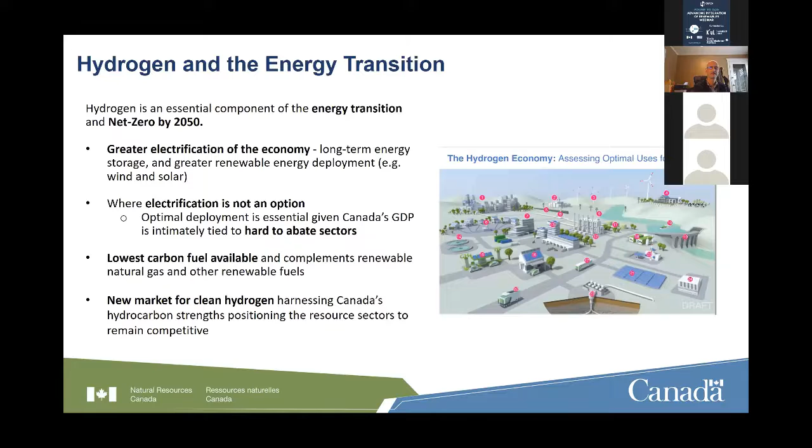But there's also a market with clean hydrogen that can harness Canada's conventional hydrocarbon strengths. I'll talk a bit more about that. But really, the hydrogen and fuel cell story is a Canadian story.

Even though globally there's a lot happening, it really started here in Canada, on the hydrogen side in 1915, with an early patent for large-scale hydrogen production, originally for fertilizer use, using Canada's clean electricity grid at the time in Niagara Falls. The first very large-scale hydrogen production equipment was developed in 1920. And in 1935, there was an original patent for direct reduction of iron using hydrogen.

That becomes important because that's a new market that's just expanding for hydrogen now. And then, of course, fuel cells—for more than 40 years, Canadian companies have been leading in the fuel cell industry as well. The first group of vehicles was in Vancouver, the first bus fleet deployed in Whistler, and then the first train in Germany also used Canadian fuel cell technology. So the hydrogen and fuel cell story really is a Canadian story.

But there's been false starts. What's different this time? This is a question we hear as policymakers all the time. Well, really now it's that perfect storm—technologies, strategic partnerships, and policies all pulling together. The Canadian government and governments around the world are focused on climate action, on energy transformation, on energy security, and on economic growth. Especially now in the post-COVID recovery lens, economic growth is essential, and there are really opportunities for hydrogen there as well.

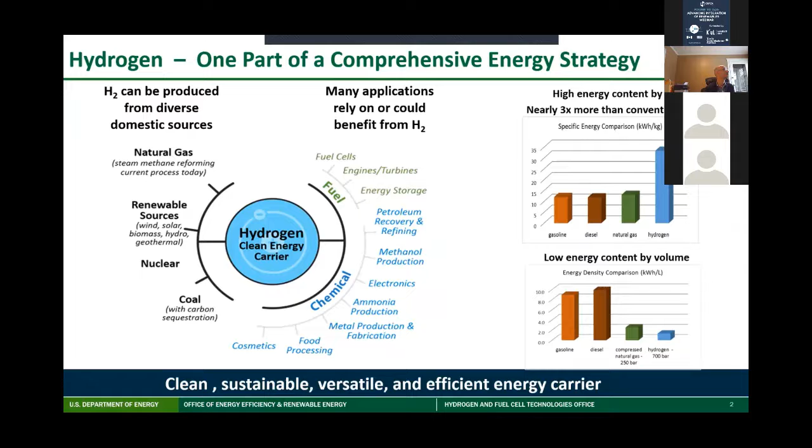Caverns, for instance, can store gigawatt hours of energy, so for long duration energy storage there's growing interest. There's also quite a few stations, a lot of state activities.

We have about 45 commercial retail stations, again mostly in California, and about 8,500 commercially sold or leased fuel cell cars - more than any other country, and that's partly because of the ZEV, the zero emission vehicle mandate. But it's really not just about vehicles.

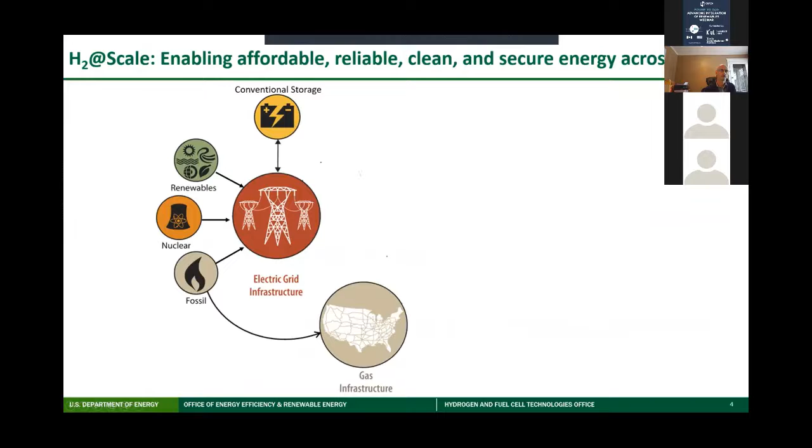That's where I think it's important to emphasize the intent of this workshop. And the vision is what we call H2 at scale, also called power to gas, or some countries call it sector coupling. Today we have basically the conventional grid shown in orange here, primary sources, and then the gas grid.

And if we produce hydrogen, you can see that opens up a number of possibilities. You can either feed that back to the grid using a fuel cell or turbine, or you can inject it into the natural gas pipeline. What's key is you can open up a number of other opportunities across sectors and across applications. You can see you couple and decouple from the grid in very unique ways with hydrogen. And the value, again, is not just for one application, but opening up the benefits for multiple applications.

Even steel manufacturing, for instance - we're seeing it as a big contributor to greenhouse gas emissions - using hydrogen for steel, fertilizer, and hydrogen plus CO2 for liquid fuels, increased interest in that space as well.

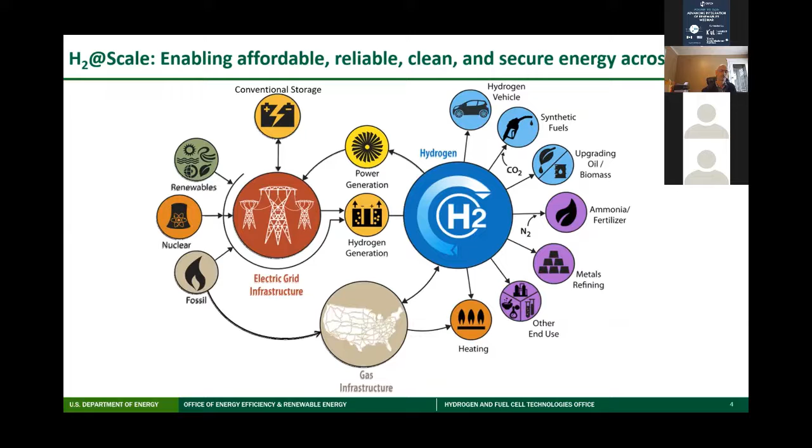So again, that's from a big picture perspective, but what really is different now compared to previously? I've also, as Aaron, we've known each other for a long time, been in this field. I think many of you on this call have been in the field for a long time. And I'll just highlight three main areas I think things have changed.

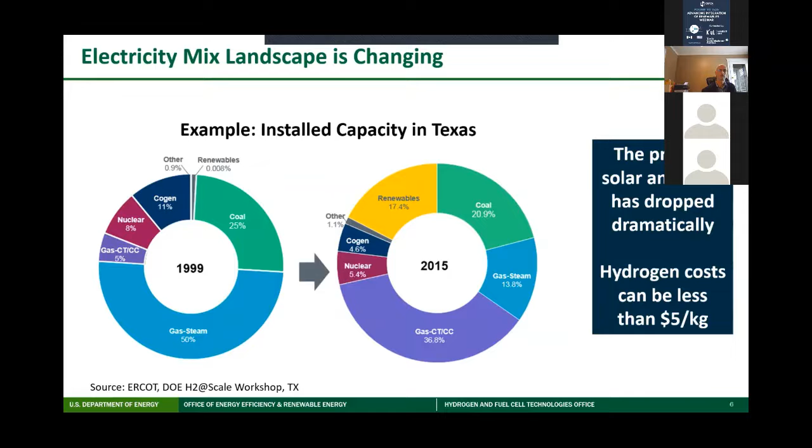We've shown this through our national labs. We have 17 national labs under the Department of Energy with significant R&D and demonstrations. For the very first time, we are going to be connecting a fast charger to the electrolyzer system and looking at that grid interaction, how we can compensate. That's the second area.

Change in the grid mix, the type of grid profile. And then finally, the last but not least, which I think is a major change compared to before, is that they're actually commercial products. Costs are coming down, thousands of commercial products across applications - stationary fuel cells, vehicles, stations. For the first time, we've actually surpassed the 1 gigawatt mark in terms of fuel cells shipped worldwide.

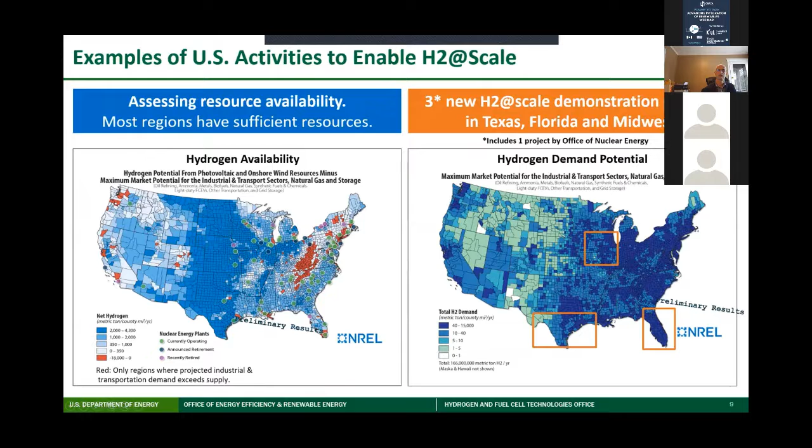And for the first time, we announced we have 3 new H2@Scale demonstration projects. And it's not just California, we have Texas, the Midwest, and Florida. Our slides will be available, but I'll walk through quickly these examples for the purpose of this conference.

To showcase Texas, looking at solar and wind, again producing hydrogen, also from renewable natural gas, and then using the hydrogen for multiple applications, including a data center.

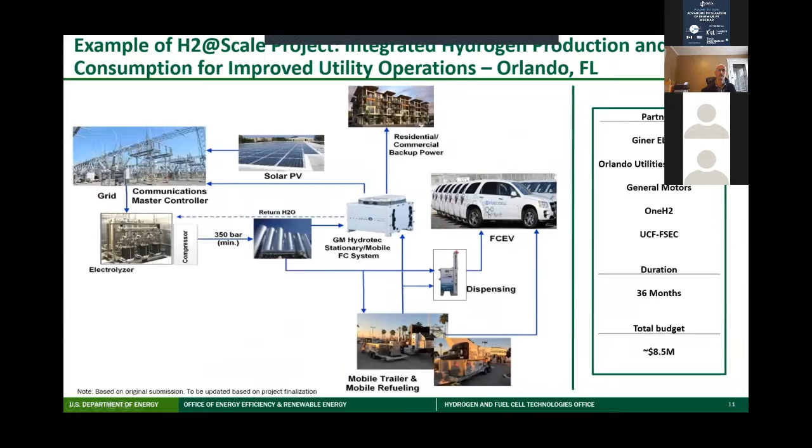In Florida, we have solar going to the electrolyzer, in addition to vehicles, looking at backup power for buildings. And then finally, for the first time, we actually have 1 nuclear-to-hydrogen project where we have an on-site electrolyzer that will produce hydrogen both for the plant's needs and also looking at additional end uses for that hydrogen. A number of partners - industry, utilities - we're really excited about these projects.

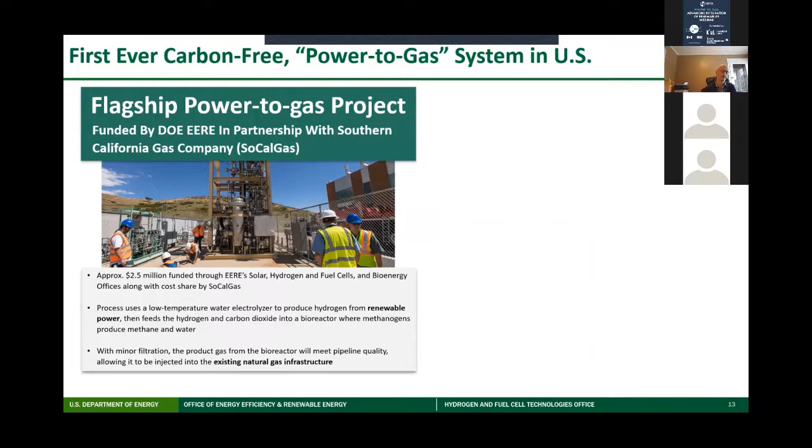And then finally, we did announce the first ever carbon-free power-to-gas system in the US, and you'll hear shortly later this afternoon from Kevin Harrison, who will describe this in more detail.

This essentially uses an electrolyzer, produces hydrogen plus CO2 for the first time with a biological process. A number of partners, including the largest gas utility in the US. So very excited about that. Feel free to look at the details and you'll hear from Kevin shortly.

And then in addition to producing methane first and then injecting into the natural gas pipeline, you can also just inject hydrogen.

I'm glad to see on the agenda you'll have more on this topic. We've recently looked at, for instance, in the US, if we could inject 20% hydrogen blends, that could enable doubling US renewable consumption, because today we produce about 700 terawatt hours. And that's the amount you would need to get that volume of hydrogen for the US pipeline.

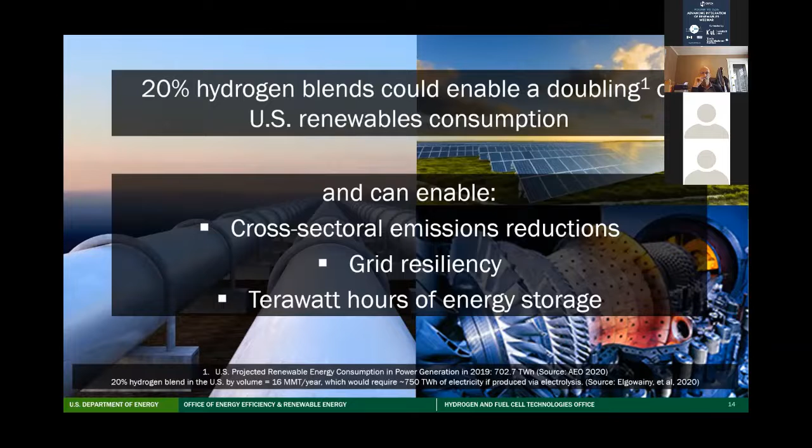So again, showing how indirectly hydrogen blends can enable cross-sector emissions reductions, obviously grid resiliency, as I mentioned, with the electrolyzer, and a huge amount of energy storage. We've launched a HyBlend consortium and other lab activities that we're starting to look into on how to enable hydrogen blending with natural gas.

And then finally, one area we always get questions about, so I always like to end with this, and I think Darren also alluded to it, is the importance of safety. As we see new players coming into the market space, they have questions about siting hydrogen, risk analysis, and so forth. So we have a lot of tools available.

In case you're not aware, there's a global Center for Hydrogen Safety that was launched. I know Canada's been a strong partner as well. It's modeled after the Center for Chemical Process Safety, with industry leads, governments, and major companies also supporting this. Go to aiche.org for access to 110 countries and a number of members providing resources, tools, and training information. Hopefully if anyone's interested, feel free to look this up. We can also connect you with the right lead there.

Anyone can join. And in the spirit of the conference and the co-organizers, I'll end with: in addition to our office, which is one of the technology offices at DOE such as solar, wind, hydrogen fuel cells is one of those, but we also have a DOE office of Indian energy.

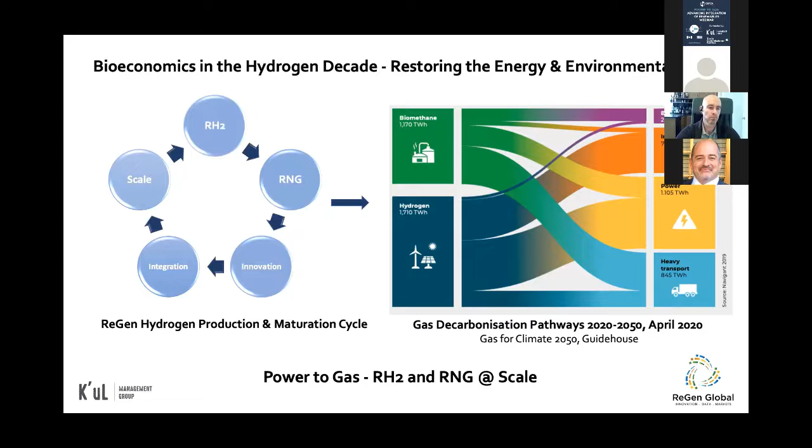And we've got an interesting chart here about the end uses for biomethane and hydrogen in buildings, industry, power, and transport. Aaron touched on a lot of that, and so did Sunita. But our goal is to take the best of what those programs have to offer and then integrate them into our work in innovation and investment ecosystems on the Canada and US side, bringing the core competencies of each country and their talent together in a way. And we create these new niches based on innovation, data, and markets.

And our first piece, as Jonathan mentioned, is we've got this renewable hydrogen that we'll be producing. We'd like to inject it into the pipeline, but we'd also like to branch off from that pipeline and build, as part of the development for K'uL Group in Penticton, a community that's 100% hydrogen, using the models that are occurring right now in the UK and Australia. We carve out 100 of 1,000 homes, and we run them off of a 100% hydrogen microgrid, using the strategy, the sites, the assets, the data, the expertise, and the collaborative foundations that are already in place with our UK partners and our Australian partners.

And we have those as well. We just didn't want to include this in the slide. We wanted to focus on Canada and the US. But as Aaron mentioned, this is very broad-based.

This breakthrough in hydrogen is real. This is the first year of the long-promised hydrogen economy. And there was some thought and concern: what's going to happen? Because of the coronavirus, is this a setback? Are we all in limbo again? And what we found is not only are we not in limbo, but people are doubling their investments, or they're accelerating their pilot projects and demonstration projects. So that's worked very, very well for us, because we're ready to move on this, and we're ready to move on this now.

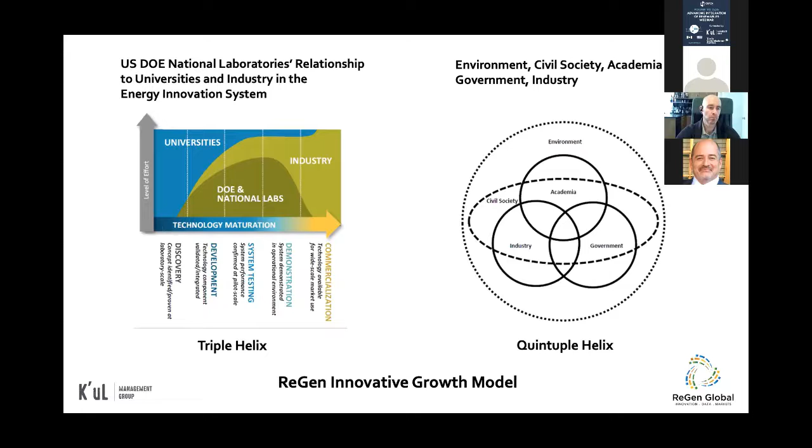This is an important piece on the relationships between Indigenous Canada and Native US and how we can build this clean energy consortium. The International Intertribal Trade and Investment Organization is a critical group, Canadian-based, that's brought a lot of this communication and collaboration together. They've done a lot of relationship building on the US side. Of course, there's the British Columbia Assembly of First Nations.

And then there are all of the US players, particularly the Oklahoma players, with the tribes represented there, and the Iron Horse Industrial Park, where ProPipe will be building their new pipe, and they will be building a custom blend for us for hydrogen to take us into these microgrid projects and 100% hydrogen community-based projects, whether that's in a rural location, remote location for First Nations or Alaskan tribes or tribes in Arizona or Nevada, or something entirely different. We want to perfect this expertise in distributed generation and hydrogen microgrids.

Now, to give an example of what we think the Oklahoma tribes have to offer, the Indigenous nations or First Nations, this is a growth pattern we've established here. Our tribes haven't always had this level of financial success, but we've achieved that largely through gaming and then diversified into multiple sectors in multiple countries, to the point where we're able to contribute $12.9 billion in total goods and services to the state of Oklahoma in 2017, which is the latest numbers we've got for that year. And we've obviously got operations and businesses in over 30 countries.

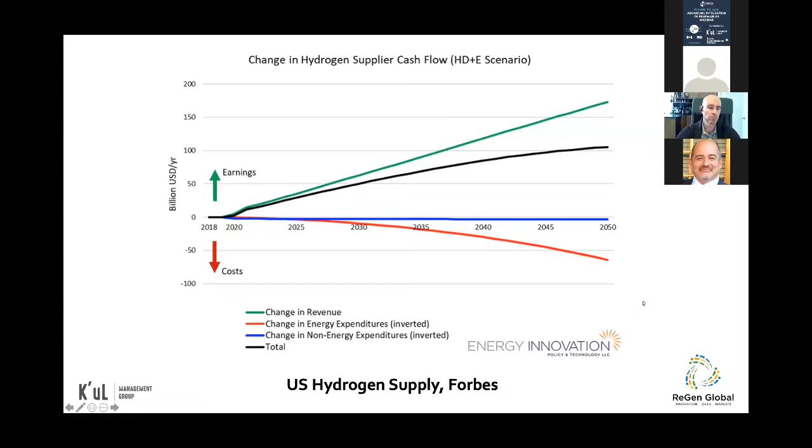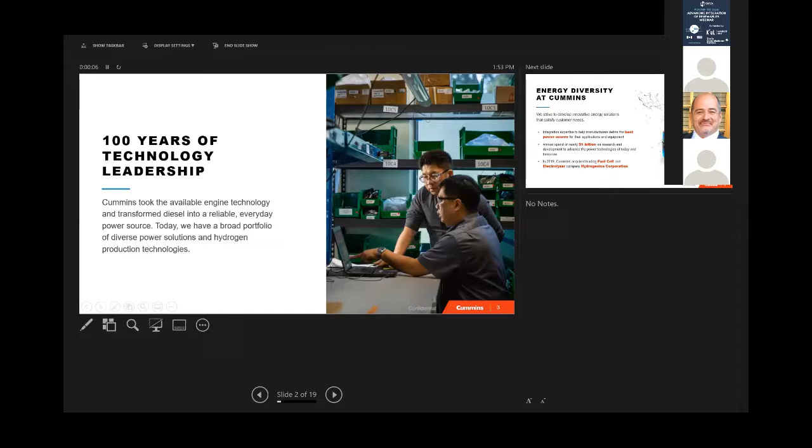Thank you, everyone, thanks for the feedback, and thanks for the invitation. My name is Michel Archambault. I work for Hydrogenics, which is a Cummins Inc. company. I'll start by giving a quick background on Cummins.

Most people are familiar with Cummins. We have 100 years of technology leadership, and we've taken the engine technology and transformed diesel into a reliable, everyday power source. Today's Cummins has a broad portfolio of power solutions, including hydrogen production technologies.

There's 3 points here that are important. Cummins always strives to define the best power source for the applications. So think about 100 years of diesel and transiting now to other sources of power. And that's why we spend every year hundreds of millions, and last year almost $1 billion, in research and development

in power technologies of today and tomorrow. And as a result, in 2019, Cummins acquired the leading company Hydrogenics Corporation, which I was part of and I'm still part of. Hydrogenics is a fuel cell, PEM fuel cells, and PEM and alkaline electrolyzer company.

The products that Hydrogenics made—I'll start with the fuel cells. Our fuel cells were integrated in hundreds of buses and trucks and lots of vehicles over the past 25 years, including one of the key projects we've been working on, the passenger trains in Germany, which are now electric using our fuel cell. So technology from Canada used all over the world.

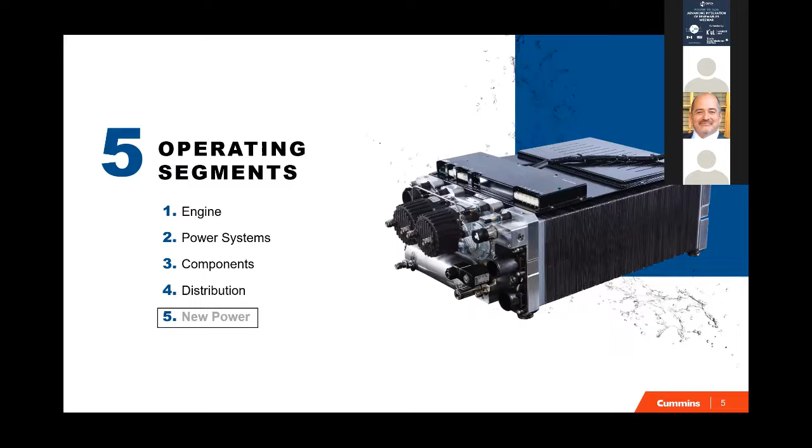Hydrogenics is now part of one new segment of Cummins, called New Power. Traditionally, we had engine, power systems, components and distribution at Cummins, and New Power incorporates the 4 new acquisitions that Cummins has made over the past 3 years, including 2 battery technology companies, listed at the bottom left, Brammo and Johnson Matthey, and 2 other companies, EDI, which is an electrified powertrain company.

They're integrators able to take fuel cells and batteries and put that into powertrains, because Cummins does not sell trucks, they sell powertrains. And finally, Hydrogenics, which we've discussed. Going back to the powertrains, we now look at an overall solution or broad portfolio, including diesel, natural gas, hybrid electric, battery electric, and fuel cell electric. So it really gives us a wide range of solutions to propel vehicles.

Now skipping to the point of interest here, the electrolysis portion. We've developed our PEM electrolyzers over 20 plus years. In fact, we've been making electrolyzers for 70 plus years. Earlier, Aaron Hoskins mentioned since the 1920s and 30s, but he was referring to a company called Stuart Energy, which was in turn acquired by Hydrogenics and is now part of Cummins. Hydrogenics, being a PEM fuel cell technology company, used all its expertise and development in fuel cell work to apply that to developing what is known today as the world's most compact and power-dense electrolyzer stack, which you can see at the bottom right. This development has been made with a lot of demo projects until it reached commercialization.

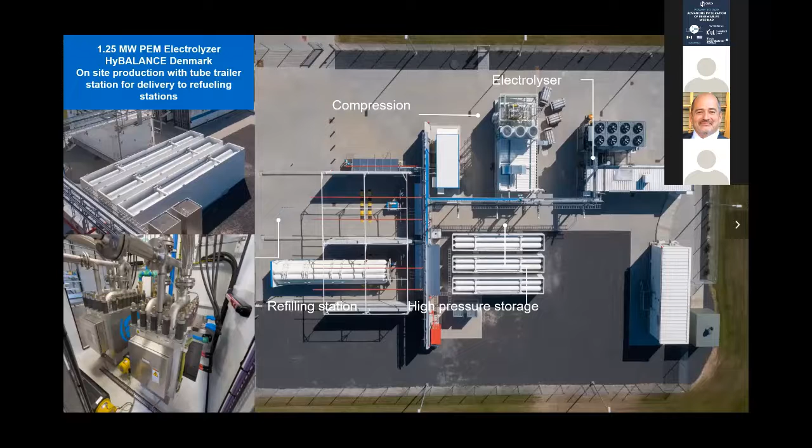One example of these projects is something we're looking at doing in Canada, in Quebec, British Columbia, or other provinces interested in hydrogen. It's basically building a centralized electrolyzer, which you can see here. This project has been done in Denmark, but can be easily applied to North America, trucking out the hydrogen and supporting fueling stations, industrial sites, or any hydrogen consumer. That plant produces 500 kilograms per day and is operated by Air Liquide at a site in Denmark.

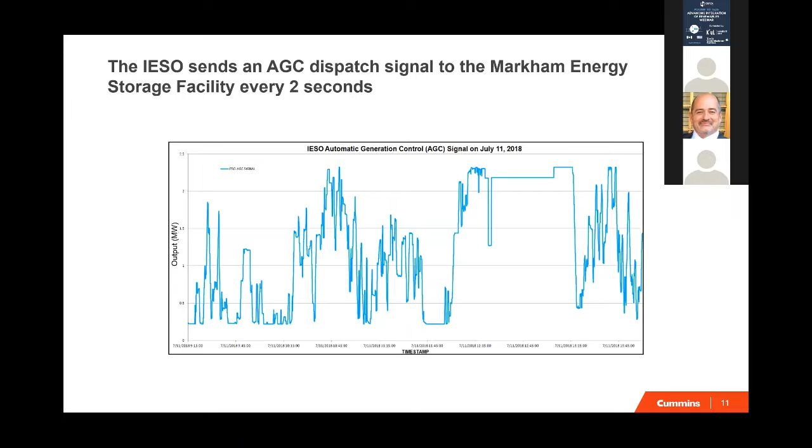As we continue to develop our technology and scale up the power density of our stacks and output while reducing the footprint, we get very attractive design plans with low total cost of ownership. What you see here is a plant that can go up to 8 tons per day of hydrogen using only 4 electrolyzers. If you can see the mouse moving, these 4 skids are all you need to produce all that fuel, or all that industrial hydrogen.

The key benefits we've seen over time, with 70 plus years of experience making electrolyzers using alkaline technology, is that when we switch to PEM, the efficiency isn't plateaued, we can actually be more efficient than alkaline electrolysis. It's a much more compact installation, and compact matters because even when projects like wind farms say they have lots of space, using more space still costs more money. So a smaller building, lighter stacks, and lighter equipment are easier to install, and it's very modular as well. Finally, we have three other points: 30 bar, meaning we pressurize the hydrogen without any compressors, so very low maintenance, a very dynamic response, and finally no harmful chemicals.

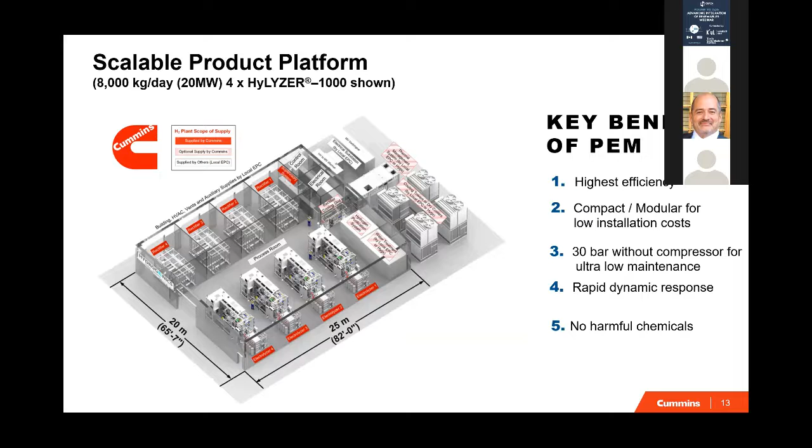If we scale that plant to a real plant, this is in Quebec. This is a 20 megawatt electrolyzer plant that we're actually working on with Air Liquide. It's an industrial production plant aimed at being in operation before the end of the year. This will produce 8 tons per day using the exact same electrolyzer I've shown you on the previous slides.

I have two more slides. We intend to continue to leverage heavy duty mobility and fuel cell transportation, and create that demand for our electrolyzers. You can see that there's a very good fit between production and utilization. On that note, I'll stop, and I thank you for your time.

Thank you very much, Michel, for that update from Hydrogenics and Cummins. We will now hear from Air Liquide Canada, represented here today by Mr. Jacques Sénécal, Director of Capital Implementation, and Mr. Jean Wattel, Manager of Air Liquide's hydrogen production facility in Bécancour, Quebec. Air Liquide is the leading producer and distributor of industrial gases in Canada and has more than 40 years of expertise in the entire hydrogen chain, from production, storage, and distribution. Jacques and Jean.

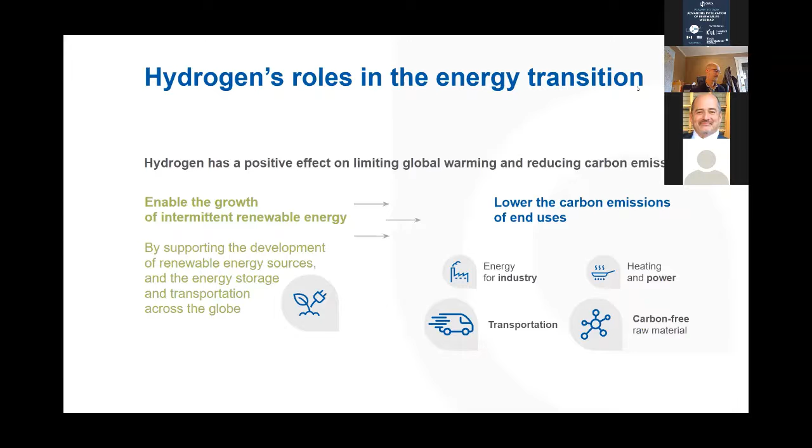Here in Bécancour, our customers are mainly industry, but we have plans to help transportation with some projects developing in the Northeast US. There are 7 roles of hydrogen: renewable power generation, distribution of energy as a buffer. This is a very strong attribute of hydrogen, to act as a buffer either in liquid or high pressure tanks.

Of course, we talked a lot about decarbonized transportation. Industry is our main market here in Bécancour. We can talk about heating and power for houses and stuff like that, and of course the feedstock for carbon capture.

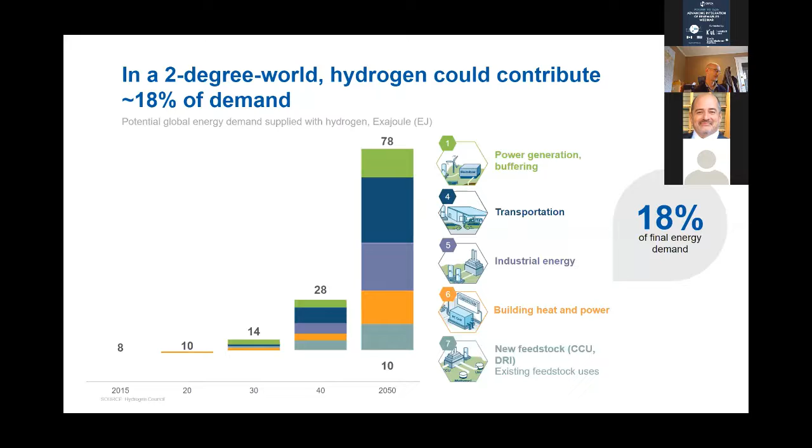Nothing new here: we can see that in a 2 degree world of temperature increase, there is more and more usage of hydrogen during the next few decades. Again, plus or minus 18% more of the demand for energy. This is what we believe will happen over the next decade.

Hydrogen is a clean, safe, and versatile energy. We can produce it without a carbon footprint. We can transport it over long distances, either by pipeline, as we see in the Gulf Coast, or as liquid. Here in Bécancour, we ship liquid hydrogen up to Edmonton, Canada. We also went to Whistler for the 2010 Olympics — that hydrogen was produced in Bécancour.

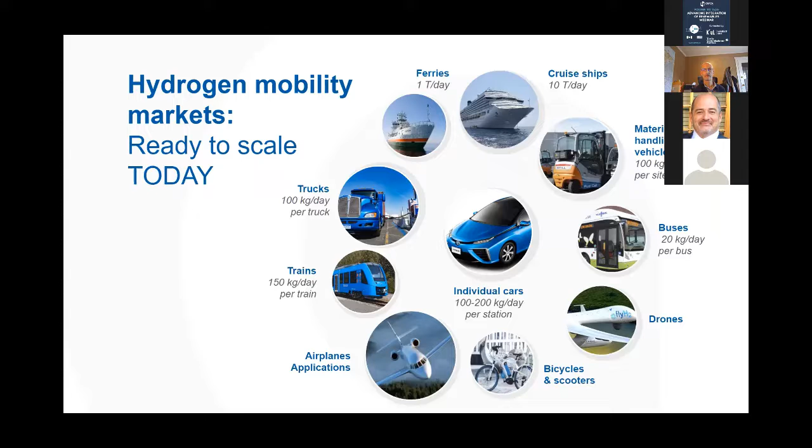And mobility — everybody has talked a bit about it. Material handling and lift trucks are very popular; we have a lot of applications here in America and in Europe. Michel showed us trains, trucks, and buses, and yes, there's a lot of movement on that side too. Air Liquide is already involved in many mobility fuel stations here and there — California, Japan, Dubai, Korea, Paris, Germany, Denmark, and the US, Northeast US too.

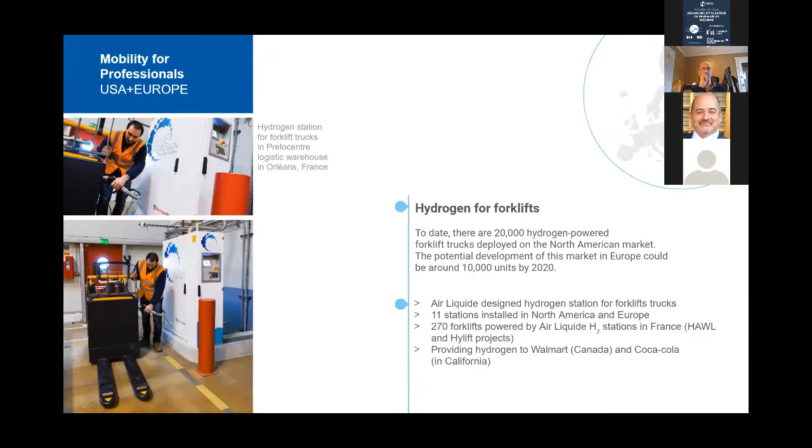Like I said, forklifts are very popular. There are approximately 20,000 hydrogen-powered forklift trucks deployed in the North American market. This is quite important, and we have a couple of customers here in Bécancour that use the hydrogen we produce for that application too.

Okay, I will continue the presentation. My name is Jacques Sénécal. I'm the project director for Air Liquide in North America.

In 2018, we were short of molecule in Bécancour, and we had already been operating electrolyzers starting in 1987. We were producing 3 tons of hydrogen with alkaline technology. Those electrolyzers were at the end of their life, and on top of that we needed to increase capacity in Bécancour. When I developed the project in 2018, we looked at different technologies, including steam methane reformer with natural gas, steam methane reformer with biogas, and electrolyzer — we had 12 different electrolyzer solutions.

When we finished the development, we managed to get, at the same economics, a PEM technology project that could run, and that's what we presented to our management. It was approved, and we chose Hydrogenics PEM technology to move forward on this project.

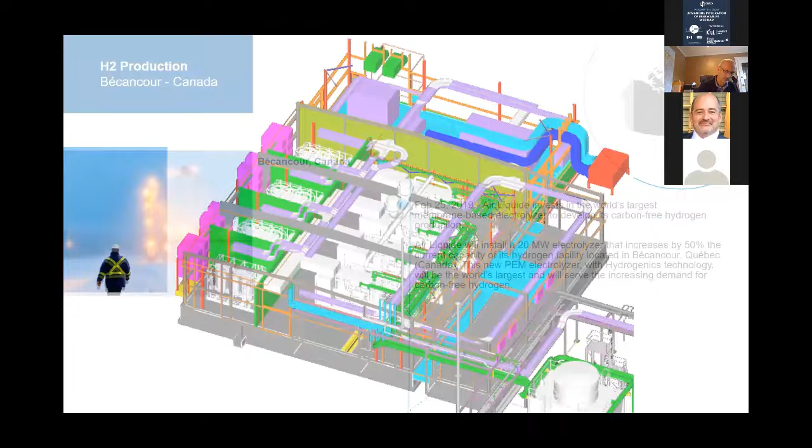Physically, as you can see, Michel has a better budget than I. This is the same plan that Michel presented. It's the 3D model, a project that is in construction. With COVID and the confinement, the project was stopped for 8 weeks.

However, we restarted 2 weeks and a half ago, and the project is moving very quickly. The timeline for this project: we made the decision in Q1 2019, with the plan to start in October. We have started to receive the equipment already, and we have the ramp up for Q3 2020, with industrial operation beginning Q4 2020.

It's moving relatively quickly. This project is the largest green hydrogen, decarbonized hydrogen project that will be in operation. But my vision, the vision we have at Air Liquide, is that probably in the next 2-3 years it will become more small-scale versus what we're seeing come up. But we see a lot of potential, and the project is moving very well. Next fall will be the demonstration that everything is fine.

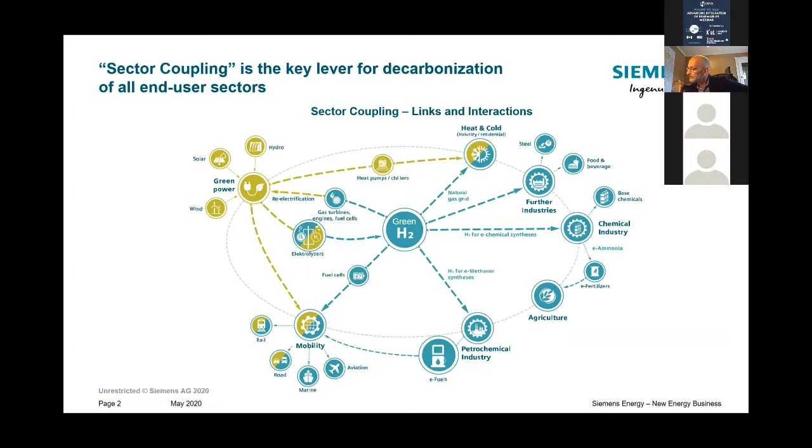As Sonia mentioned earlier, there are different ways of saying the same thing, and at Siemens Energy we call it sector coupling. We have the production of green power, the production of hydrogen, and then, as a few speakers already noted, there are lots of uses for hydrogen within this new and burgeoning economy. I think the head of the Hydrogen Council for Canada, Bob Stasso, put it very well when he said that hydrogen is electrification, especially green hydrogen, because by producing hydrogen from renewable electricity, what we're really doing is creating an electrification bridge between the renewable energy sector and the sectors of the economy that use hydrogen, either as a feedstock or directly.

Wasn't sure exactly where to begin, being the third in a line of organizations talking about production of hydrogen. I think there are just a couple of things I want to point out on this slide, from a history, or at least an engineering, point of view. The energy content of a kilogram of hydrogen amounts to an equivalent of about 39.4 kilowatt hours. This is a useful number that I like to keep in mind.

This doesn't include the efficiency of producing the hydrogen, but essentially what we see is that 1 kilogram represents about 39.4 kilowatt hours of energy, or conversely, 1 kilogram per hour of production requires 39.4 kilowatts of power, again needing to factor in the efficiency of the electrolysis system you are using at the time.

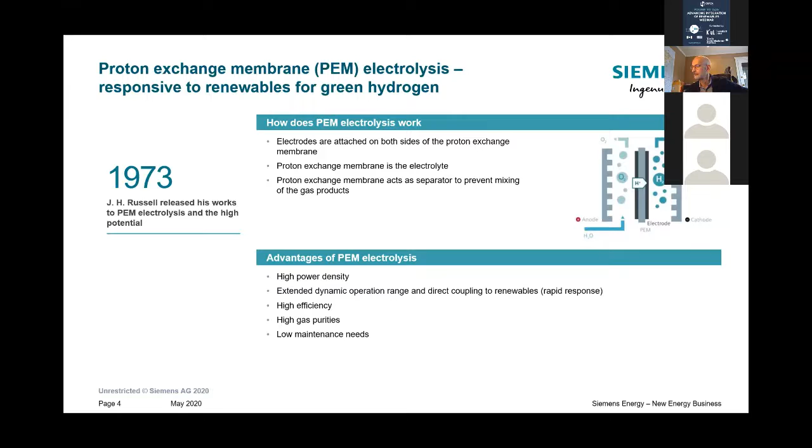Just a word on how PEM electrolysis works. We have a membrane that separates the electrodes and through which hydrogen ions pass in order to combine to produce hydrogen gas. It has a very high power density, and is very high dynamic operation, which allows it to be very responsive to the type of renewable energy production we're focused on in the green economy. Very quick, fast startup and shutdown, very clean operation of the PEM electrolysis system, and very competitive in terms of its capital cost and the overall cost of hydrogen.

Although, as we all know, the economics of hydrogen production through electrolysis does face a few hurdles that need to be addressed, and are being addressed through things like the Clean Fuel Standard and potential development rates for hydro, as are being discussed by groups like BC Hydro.

Now to speak more about Siemens' approach to hydrogen generation specifically. Siemens has been in this business for some time with lab-scale demos and commercial operating devices of a previous form that we called the Silyzer 200. We've now entered the age of the Silyzer 300 that I'll talk more about in terms of its production and use. Of course, we continue with our research and development and intend to grow our technology rapidly over time.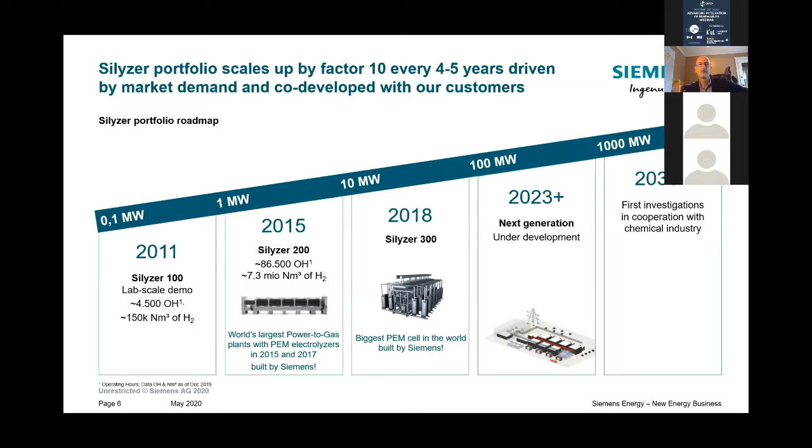This gives a good indication of the Silyzer 300 electrolyzer itself. What you see on the right is an image of a full array. There are 24 modules, and each module is around the size of a refrigerator, a taller and thinner one. But that's where the stack of electrolyzers and proton exchange membranes exist. Pressed together, the gases are captured through natural convection above the device.

24 of these modules are in a full array. The array has a system efficiency of 75%. And altogether, there is a power requirement of 17.5 megawatts for the type of array you see in the picture, with an output of 330 kilograms of hydrogen per hour.

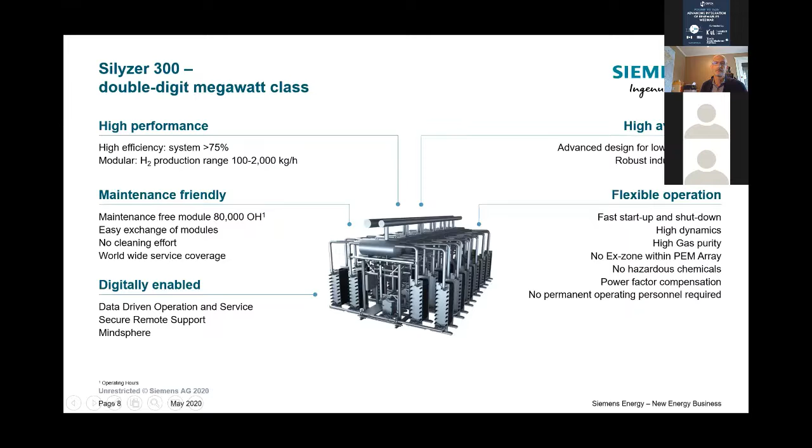This is a sort of base unit, a modular unit that can be increased or decreased in size. As mentioned, at 75% efficiency we can modularize and put these out in a range producing 100 to 2,000 kilograms per hour. Maintenance friendly in terms of its ability to swap out modules as required after the end of operating life. Digitally enabled through our control systems, high availability, and very fast and flexible operation.

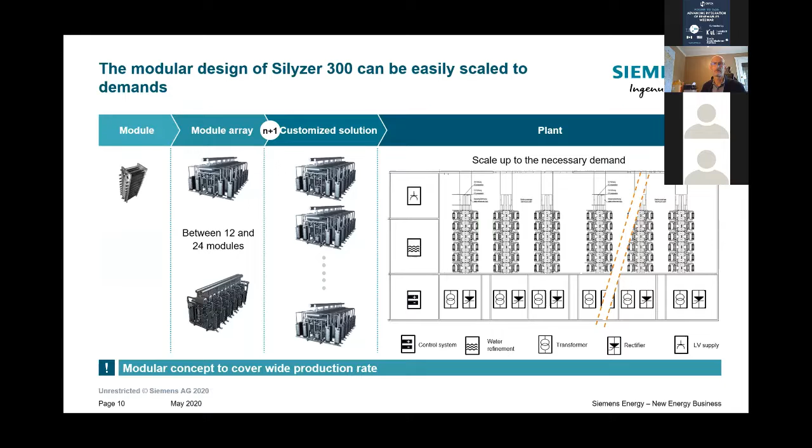Of course, the electrolyzer itself is only one component of an entire system. We would, of course, when using grid power, have a high voltage transformer, a medium voltage transformer and rectifier to get the DC current that is required input to the electrolyzer. Water treatment in terms of using demineralized water. Cooling - when we refer to 75% efficiency, that implies there's quite a significant amount of excess heat.

I think a later presenter is going to discuss one of the potential uses of that heat so that it doesn't go to waste. Gas purification, compression, and then either storage or delivery or injection into the grid, as was talked about earlier, or any one of a number of extended use cases in terms of methane, methanol, ammonia production, or other downstream use cases. Siemens is able to offer a tremendous number of components on the value chain, not exclusive to the electrolyzer itself.

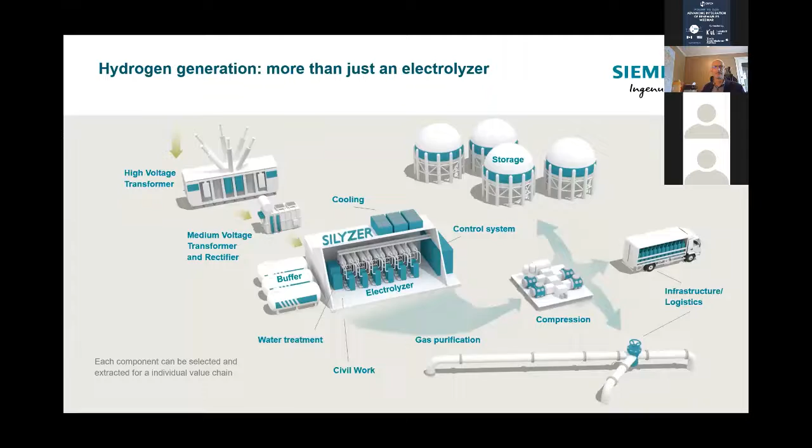Everything from upstream planning and consulting, balance of plant, renewable energy, connection to the grid, compression and downstream fluid handling. We are also in the carbon capture business and work externally with direct air capture providers, and are able to partner for synthesis of some of the downstream products we've discussed.

One other thing I mentioned at the beginning: one of our key divisions is the power generation unit. Siemens makes significantly sized gas turbine engines for power production, and many are already able to handle significant proportions of hydrogen as an input fuel, in some cases 100%. Our goal is by 2030 to handle 100% hydrogen in all of our gas turbines, to support the pathway of re-electrification: renewable energy to hydrogen, and then hydrogen back to electricity.

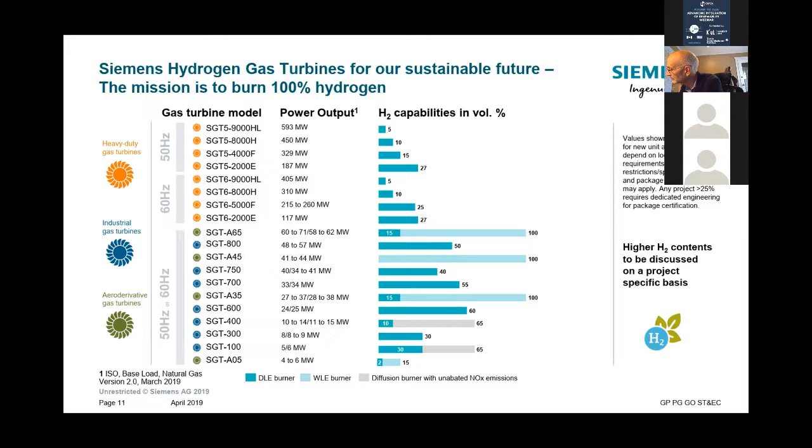A recent case, the largest to date, is in support of a steel mill in Austria, a Silyzer 300, a half-size array. So instead of the 24 units I showed you earlier, it was 12, and it's in operation in Austria. I invite you to take a look at this deck, which will be distributed afterwards; there are a few references that illuminate exactly what's happening in that project.

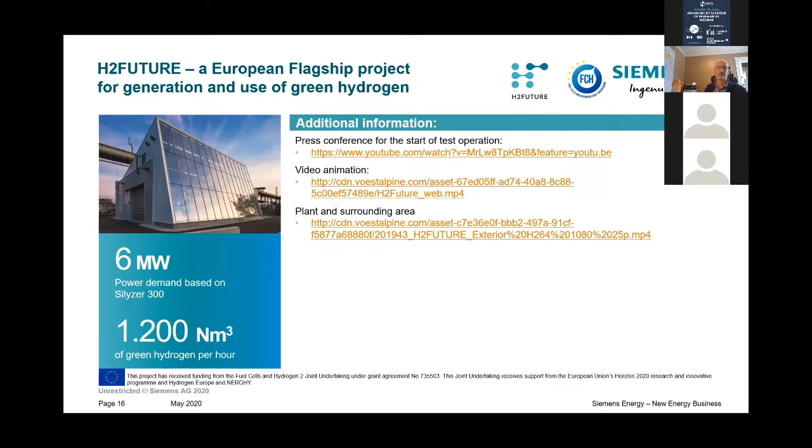Hydrogen, as has been mentioned, is a key component in the decarbonization of energy, sector coupling, and power to X. All of this, especially in Canada, must be supported by a regulatory framework. I think Aaron pointed out earlier that this is well underway in Canada and is necessary now to support this rapidly growing sector of the energy economy.

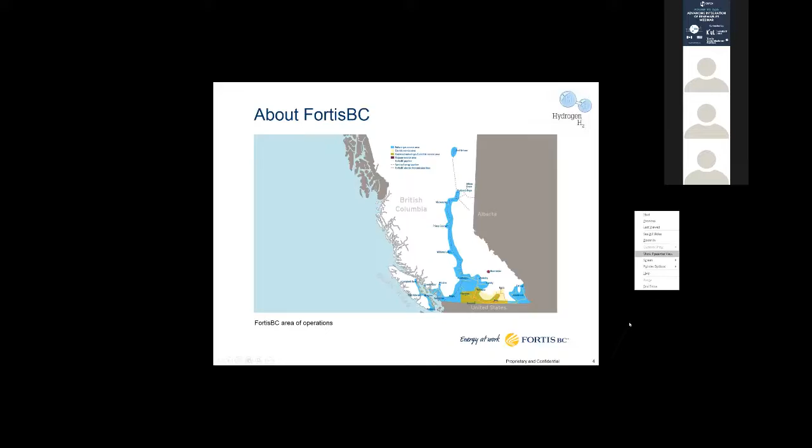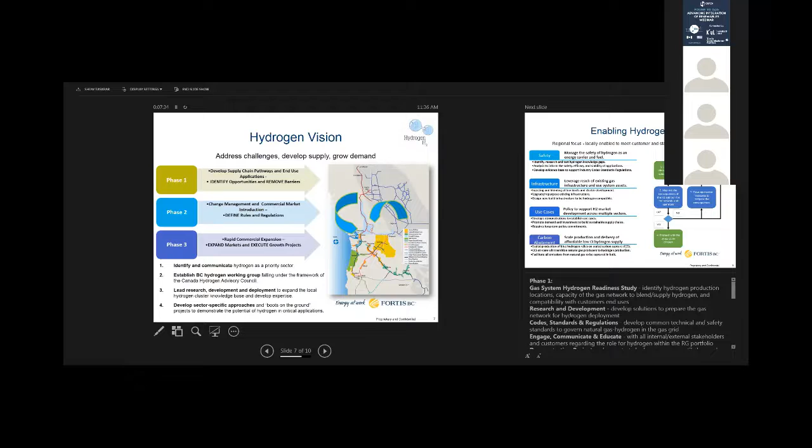And this all sits on the back of our regional infrastructure, which is presented here on the right-hand side of the slide. Various different service territories, both in BC and south of the border in the US, are shown in various shades of color. The key takeaway from this image, at least for me, is the interconnected web of the regional infrastructure, and the significant reach of that natural gas infrastructure, and how it will be a key player in enabling hydrogen as we move forward. Doing a little bit of a deeper dive on enabling hydrogen.

Achieving the vision that I just spoke to, there's four key enabling pillars that I've presented here at a high level. Safety is, I'd say, a very pertinent theme right now, and I think we'll probably hear a lot more around safety in the next presenters.

As they speak to, for example, hydrogen injection and blending, Fortis, we pride ourselves on the safe, reliable delivery of natural gas energy, and as we consider hydrogen and move forward, that same level of service and reliability will need to be maintained. Safety is a broad-based term that really speaks to that reliable delivery of energy to our customers. We'll simply need to manage that in every aspect of our development, our stepwise development plan when it comes to enabling hydrogen.

Infrastructure, I just highlighted on the previous slide. Fortis will strive to leverage the reach of the existing gas infrastructure, and we'll use our systems to the extent possible to enable hydrogen. There's a number of different methods that Fortis is considering right now. Injection and blending is probably the near-term mover.

Notwithstanding, there is certain development activities required to understand how that can be achieved safely. Injecting and blending will be a big part of enabling hydrogen as we move forward.

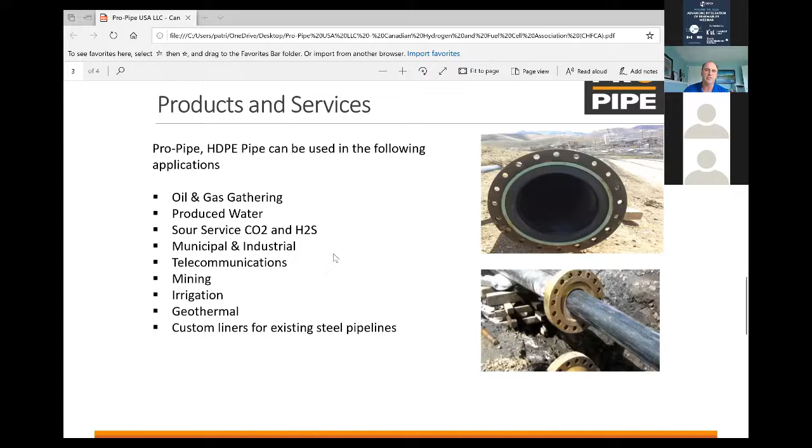Once again, being mindful of time, we've kept our presentation rather short and brief.

We also believe in the advantages of polyethylene pipe, as you'll see on the following slide. Some of the marketable advantages found in our research while executing our plan to produce pipe out of Shawnee, Oklahoma, will also serve our Canadian clients and the needs we have here in the Canadian market. We believe we're well situated to fulfill everything the market is asking for.

Lightweight, flexible, cost-effective installation - something we're really excited about. We believe in being fiscally and resourcefully responsible, and responsible to our environment, with a strong lifespan the pipe can produce. Chemical and abrasion resistance was also instrumental in developing our business model. UV resistance and superior flow characteristics determine the capital requirements for efficient and profitable operation for our customers, while being mindful of the environment.

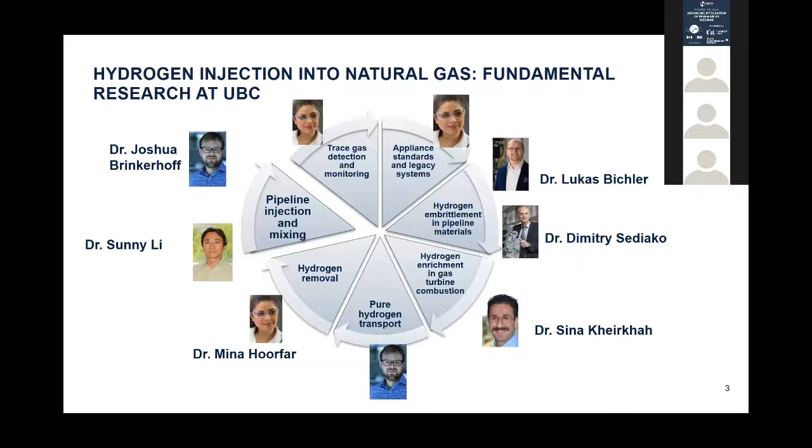As far as the fundamental research goes, we have an experimental component and a computer simulation component, and I'm going to discuss the computer simulations. The simulation is motivated by trying to understand the dynamics of mixing when hydrogen is injected into a methane pipe, understanding how the mixing occurs, how we monitor that mixing, and ensure the injection is uniform and controlled over a range of operating conditions and flow rates. The focus of the simulation is to zoom in on how the two streams, hydrogen and methane, mix in order to predict that mixing.

And what we know is that the flows are quite complex. There's a lot of turbulent flow interactions that take place, vortices that mix, resulting in a distribution of the hydrogen fraction. And we wanted to be able to have a good quality look as to how that takes place.

So we've done a very expensive, large simulation where we don't make any simplifying assumptions with regards to the nature of the turbulence mixing out these two gases. The benefit is that we get a very detailed look, and the drawback is the simulation is quite expensive in terms of the computational power and time required. But this will allow us to have very good insights as to how the blending and mixing occurs.

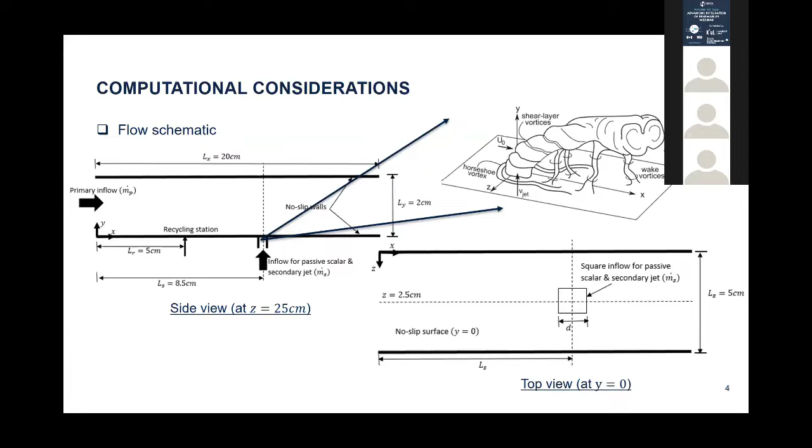Just a little bit of overview as to how it's done. It's essentially using something called computational fluid dynamics, where we simulate the equations of motion governing the gas mixing. It's run on thousands of compute cores on Niagara, which is the largest supercomputer in Canada. And this is one of the large scale simulations that we've done.

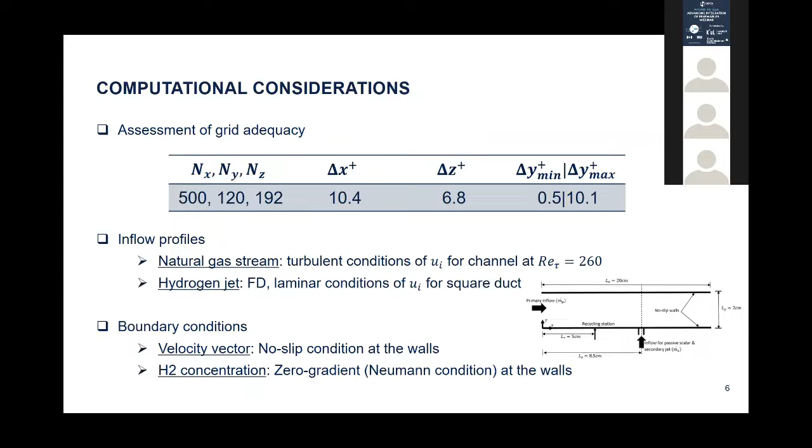I'll jump over the technical details of the simulations. Suffice to say that we have two species, natural gas and hydrogen, being mixed in a turbulent flow environment, and we're resolving everything that we can know about the turbulence, with no simplifying assumptions.

I'll make mention that there's two parameters we're adjusting here. We're adjusting the dimension of the pipe bringing the hydrogen in, and we're also varying the percentage of the flow rates of the two streams. So in this case, it's 8% hydrogen relative to natural gas.

Now, just to give a picture as to how the hydrogen concentration disperses in this turbulent environment, here is red, 100% hydrogen, and blue, 0% hydrogen. And we can see how that mixing takes place downstream.

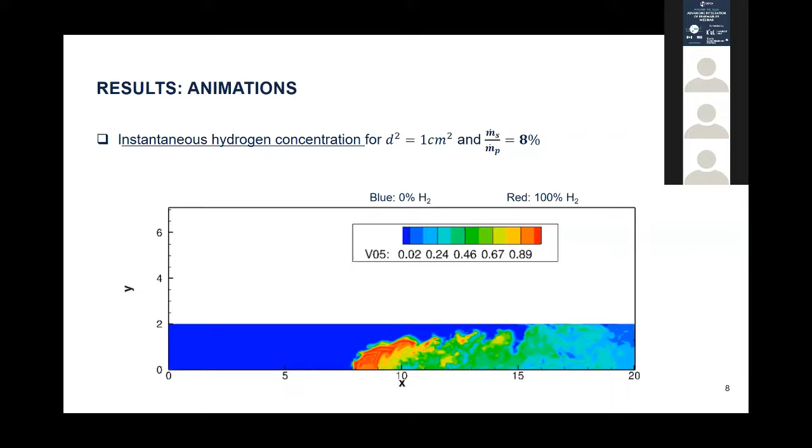And what we want to know is, what are the best parameters in terms of optimizing this mixing, making sure it occurs in a uniform, predictable way, and that we know how far downstream we'll get a certain uniformity of the hydrogen concentration. So we've done some parametric studies where we've looked at varying the hydrogen flow rates and also varying the dimensions of the tube bringing the hydrogen in, and looking at how that affects the mixing.

I'll just go on to one last slide to show some results. This is the same data but in a different slice. Now we're looking in a cross-stream slice, and we notice that even some tens, 20s of diameters downstream, the hydrogen concentration is not as uniform as we would expect.

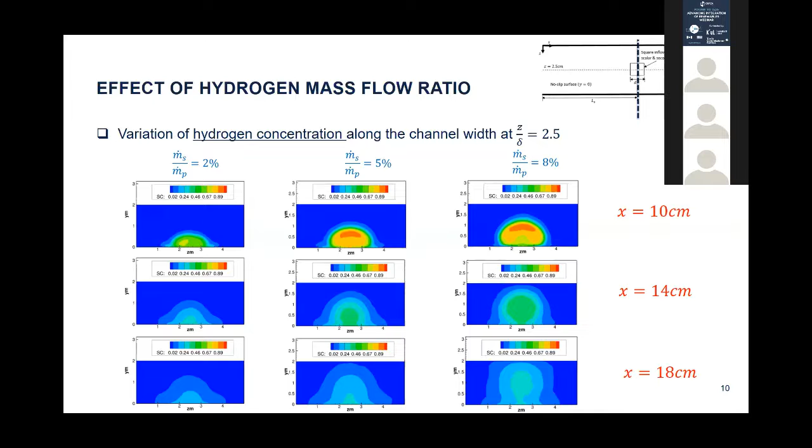We want, and this is important to keep in mind, because if the hydrogen is blended in, we want to know how far downstream of where it's injected we can be certain of having a certain level of uniformity of the hydrogen mixture, so that we know what the gas composition will be.

So this provides just a really big picture overview of what we've done. Our research is showing that there can be quite a slow recovery of a quasi-equilibrium concentration in the turbulent flow. It's possible to achieve equilibrium conditions in terms of the hydrogen concentration, but it won't occur very quickly. It may take 50 to 100 pipe diameters downstream of the injection.

We're working further on research trying to understand the effects of different injection parameters and how that works in terms of mixing downstream, and ultimately trying to come up with a parametric map where we can incorporate the relative gas properties, the injection parameters, the flow rates, and the dimensions of the injection to understand how rapidly that's going to mix downstream, to ensure it occurs in a uniform, well understood, and controlled way.

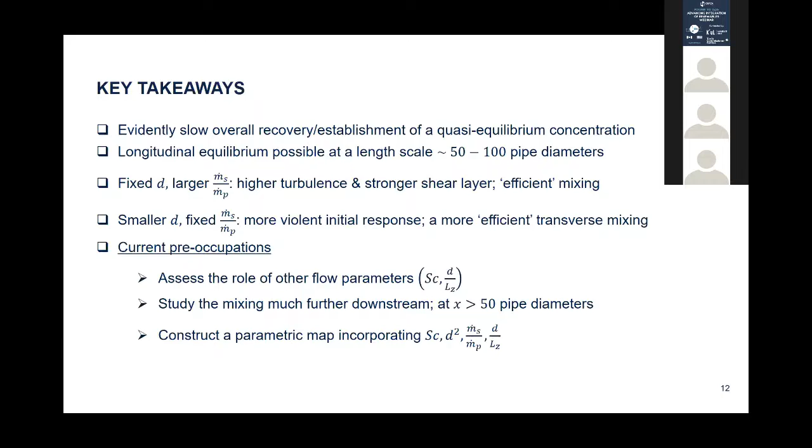This brings me to the last part of follow-on work, not just myself but a number of researchers at UBC, consulting with a number of different companies, putting together a pilot facility for building-scale hydrogen injection. We're calling this the H2 Lab, a laboratory for investigating hydrogen-enriched natural gas in a broad sense, from injection, combustion instabilities, mixing, separation, trace gas sensing, and facility integration. This facility is in planning, and we're in the process of submitting funding grants right now, and it's going to establish UBC even more so as a center of excellence for fundamental research in hydrogen injection.

And with that, I'll thank you for your attention and pass it over to you, Nicholas.

Thank you, Joshua, for the overview of the hydrogen injection research at UBC. We'll now move on to the next session, which will discuss current case studies in Canada and the United States. I'd like to present our speaker, Mr. Colin Armstrong, President and CEO of HTEC, a leading developer and provider of hydrogen fuel supply solutions.

Yeah, thanks, Nicholas. Just doing a sound check. Can you hear me? Here you go, Colin.

Thanks a lot, Nicholas, and the CHFCA crew for giving us this opportunity. I guess some of my colleagues, and I'll just do an introduction about myself: I drank the hydrogen Kool-Aid many, many years ago. I made my first hydrogen tank, probably the first hydrogen composite tank in Canada, back in 1995. I got involved in HCNG buses, which is relevant to this conversation, in 2005 when we had the first fleet in Canada. I was lucky enough to be involved in the Olympic deployment with Air Liquide and the first 20 buses that were up there. And recently, HTEC opened the first retail station in Canada.

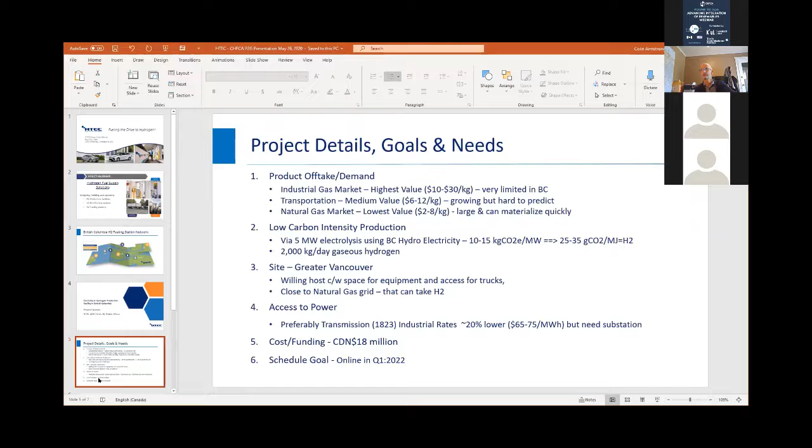People most often talk about percentage in volume percent, but when you change that to energy, your numbers go down quite a bit. So we have to be cognizant of which one we're talking about, because the value and the GHG reductions are based on the energy, not the volume.

When I look at the value, you can take a look: it's about 55 kilowatt hours to make a kilogram of hydrogen. At 7 cents a kilowatt hour, that's $3.85 just on the energy cost, or $27 per gigajoule. The current natural gas cost, just the energy portion, is about $2, so there's a bit of a differential. Fortis has been very good at coming up with creative ways to deal with this.

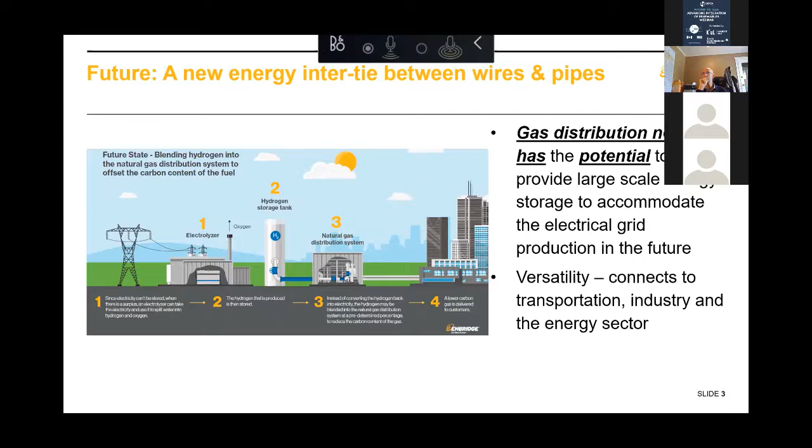The picture on the left is something I put together with our partners in corporate head office a few years ago, quickly demonstrating how our process works. We take the power, run it through an electrolyzer, producing hydrogen, and the plan is to put a small portion of this in the natural gas grid to start blending within North America. More on that to come.

The plant is under contract to the IESO - the Independent Electricity System Operator that looks after the electrical grid within the province. They use an AGC signal to control the plant. One drawback is the production output is dictated by that signal, which is primarily there to control the ancillary service we're providing: keeping the grid frequency at 60 hertz. If it's too high, they ramp up the plant to bring it back down to 60, and if too low, they back off the plant to get it back there.

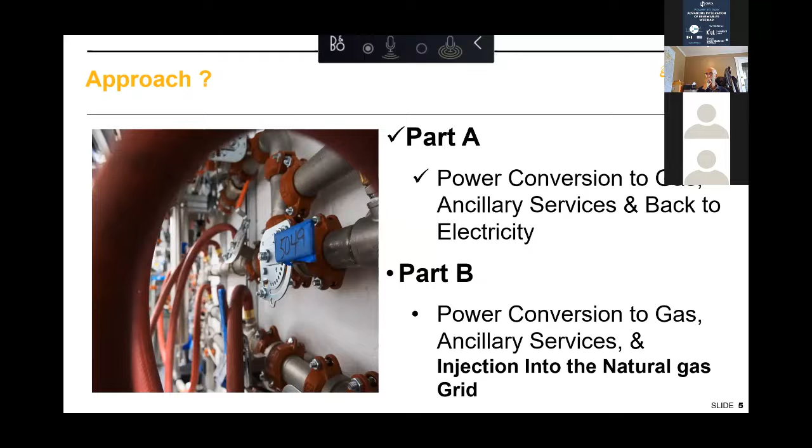We currently have an application in front of the Ontario Energy Board to blend a small amount of renewable hydrogen in a small portion of our natural gas grid - about 3,600 customers - looking to start blending with up to 2% hydrogen. We're expecting a decision from the board in November of this year, and we would start construction around Q1 next year, with hope to start blending by the end of August 2021.

Other things we're looking at, enabler of dispatchable power. This is one of the opportunities for this technology. Non-dispatchable assets like wind and solar no longer need to be curtailed. You can run them at any point and store the hydrogen for future use. We've talked about FCEVs, and there's also industrial feedstock as more industries move towards green hydrogen. And the last bullet talks about GHG-free heating.

So to summarize, renewable hydrogen, we see this as a really natural fit for Enbridge. One, because of its versatility and flexibility, just like electricity, it's an awesome energy carrier, and you can do a lot with it. The intertie between the gas and electrical grid is important for all ratepayers, for Ontarians and people across Canada and the US. The reason is you do not have to invest heavily in any additional infrastructure.

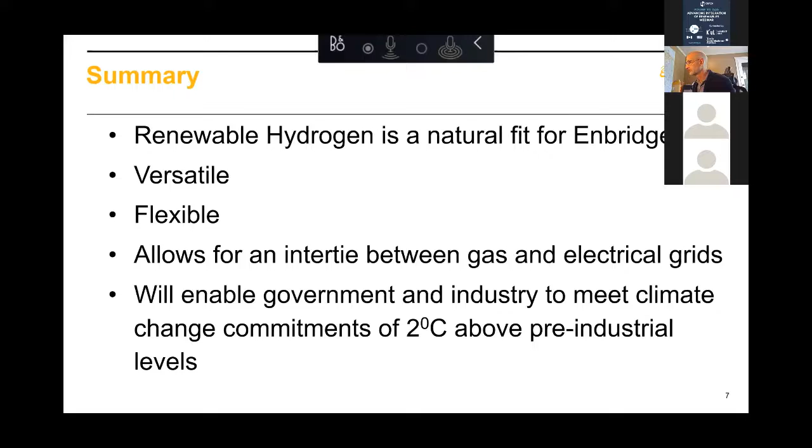On the coldest day, the gas grid in Ontario maxes out at about 80, just about 83 terawatt hours of energy. The electrical grid on the hottest day can produce about 23 terawatt hours. So we see this as a natural evolution for us, and a way for governments to save funds on infrastructure they'd otherwise have to build — it's already there, we can utilize it. We believe this is a critical part of enabling governments to meet the 2-degree pre-industrial level target that has been set. So with that, I believe I'm done.

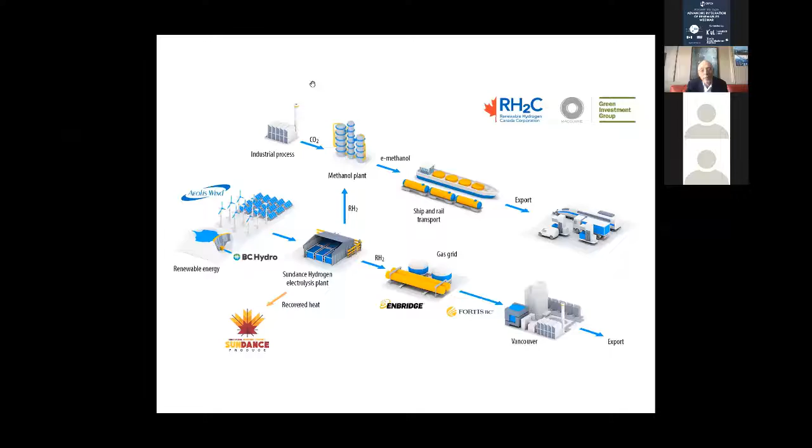Thank you for that presentation, Jürgen. Now we'll shift over to case studies in the US, and we'll hear from Mr. Kevin Harrison, Senior Manager at the National Renewable Energy Laboratory in Golden, Colorado. Kevin?

Okay, thank you very much for the introduction, and my slide should be popping up there shortly. Everyone can see my title slide, Nicholas? Yep, we can see here, Kevin. Okay, thank you very much. And thank you to everybody who's held on so far in this presentation.

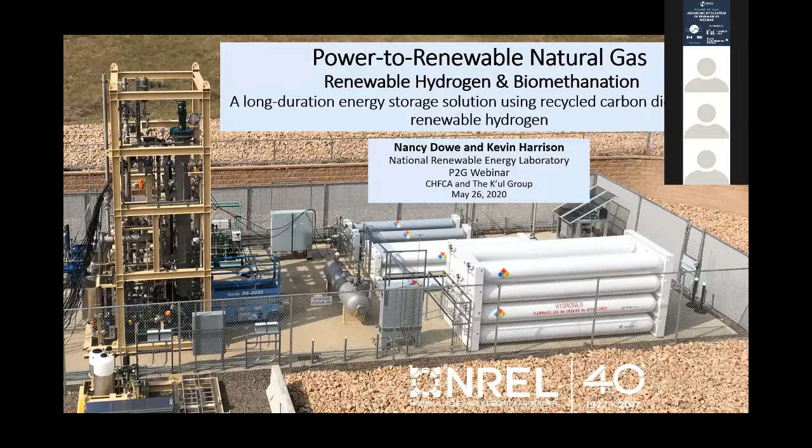This is a power to renewable natural gas discussion, and my partner, Ron Kent from SoCal Gas, will be presenting after this to provide a larger picture from his organization. But I wanted to briefly talk about NREL and our key program areas in this space. We do work on small scale cells, so we do cell level MEA type research and development on fuel cells and electrolyzers. We also do megawatt scale stack testing at our Energy Systems Integration Facility at NREL in Golden, Colorado. We believe in all aspects of this research opportunity, not only producing it, but moving it. We do compressor research, storage, and of course fuel cells.

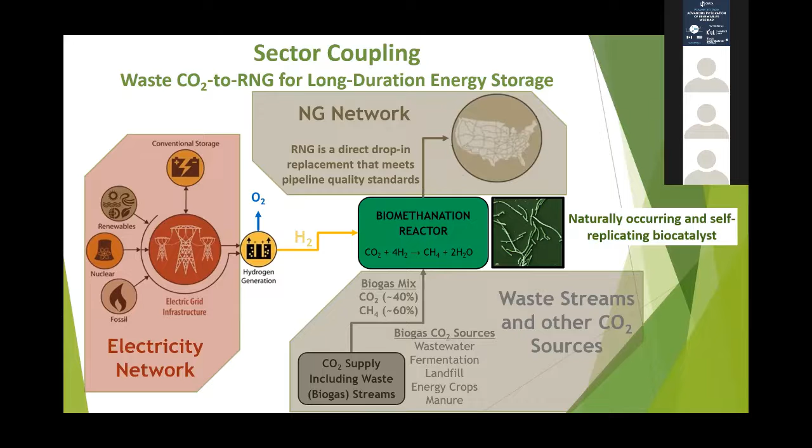Our colleague from Siemens mentioned synthesis, and that's really what the rest of this presentation discusses: the ability for hydrogen to be glued onto carbon dioxide, and be stored in the natural gas grid as a direct, 100% material compatible replacement fuel for fossil natural gas. I also agree with the sector coupling, or power to X, power to gas, whatever we want to call it. In this case, we bring together a number of sectors, really the electricity network. This is basically taking from the hydrogen at scale slide that Sunita showed a few hours back, and coupling that with waste streams. As long as there are people on the planet, we'll have wastewater treatment plants, landfills, dairies, anything releasing biogas, a mixture of methane and CO2, which can be upgraded in this bioreactor, this biomethanation process, which uses naturally occurring organisms to convert CO2 and hydrogen into methane and water. Once that leaves the green box in the center, it can be injected into the natural gas grid and do whatever natural gas does today.

It creates power as it heats homes, and as a chemical feedstock. So this is a way to carry hydrogen into the natural gas grid today on the back of CO2. No energy storage presentation's complete without showing where this technology fits. This power to gas, whether you're storing it as hydrogen or power to methane in the natural gas network, is capable of large scale, utility scale energy storage that lasts weeks or months. Our partner SoCal Gas, as Ron notes, gives you a feel for the large scale energy storage opportunity in SoCal Gas alone, having 4 underground storage facilities in their territory. This speaks to what Joshua mentioned earlier about the energy density of comparing methane and hydrogen. Adding carbon into this mix, preferably from biogenic sources at first, whether from one of the 15,000 wastewater treatment plants in the US, you get a volumetric energy density improvement by starting to recycle CO2 or some of our waste streams today.

And why is California interested in it? Well, low-cost electricity has been named multiple times as the key enabler to making low-cost hydrogen. So we took this data from California showing how much wind and solar they're already curtailing or shutting off each year. This data was borrowed from the California ISO.

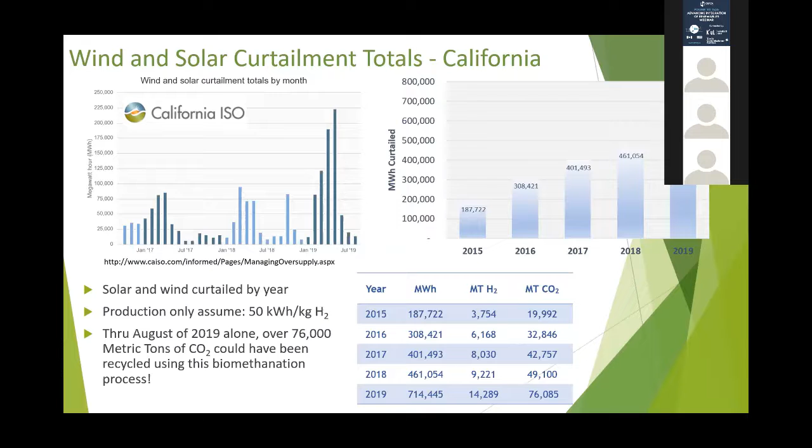So this graph needs to be updated, but presumably as California and other states, regions, and countries pursue higher penetrations of electricity, there will be a growing number of hours in the year where you can get not only low cost but zero cost electricity. There are parts of the year in Maine where the entire state has negative electricity prices because of wind, one of our partners as well.

So there exist carbon markets. California's low carbon fuel standard usually gets brought up pretty frequently, but there's also US federal programs like 45Q, where you can get tax incentives for recycling or utilizing CO2. There's also the renewable fuel standard on a federal level. So there's this growing number of carbon markets, and depending on where the carbon comes from, what color the electrons are, you can be carbon negative.

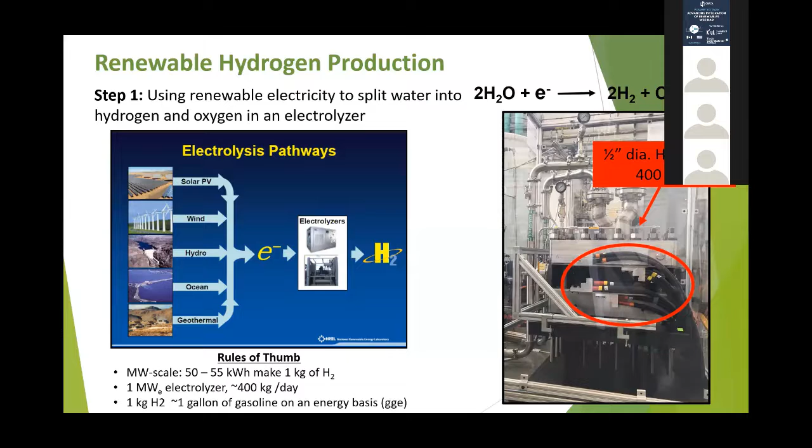That was step 1. Step 2 in this biomethanation process combines CO2, in this case from a dewar. We are not near a CO2 pipeline or source, so we actually have our CO2 trucked in for this research project. If we were closer, perhaps we would talk to Coors and try to get a CO2 pipeline from their brewing facilities down in Golden, Colorado.

But for today, we are demonstrating this at sort of the 100 to 200 kilowatt range. Our partner, Electrochaea, has demonstrated this in two different facilities in Europe, one in Denmark, one in Switzerland, so this technology is scalable. What we're pursuing in the US is closer to 5 to 10 megawatt electrolyzer systems feeding a bioreactor.

I'll list some of the benefits of this biomethanation step 2 process, because most of the energy you spend in this process goes into the electrolyzer. So if you had a 10 megawatt electrolyzer system, 95% of the energy goes into the electrolysis step, another 5% to upgrade that hydrogen, letting these organisms do the one thing they've been doing for millions of years: converting CO2 to CH4, producing pipeline quality CH4 out of this bioreactor system. The research component here for NREL is looking at hydrogen mass transfer and systems integration.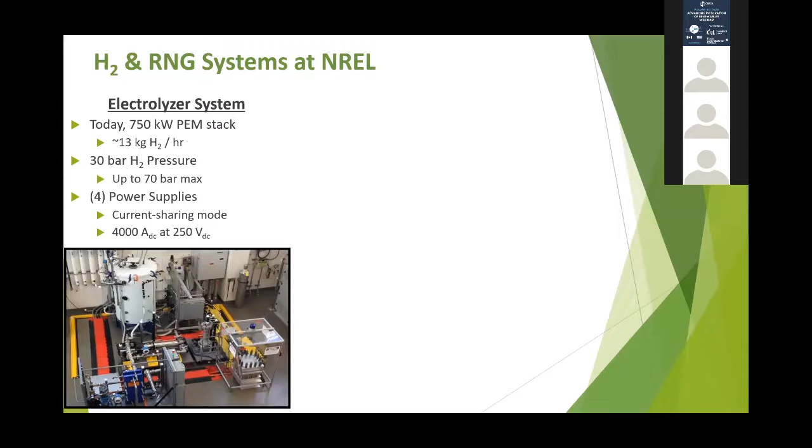Inside the building, we have this electrolyzer system that I mentioned, which we're upgrading to 750 kilowatt, balance of plant. It operates at elevated pressure. That's one of the benefits of PEM, where you can have hydrogen at 30, 40, or 50 bar, or even higher, while the oxygen water side can be lower. Outside we have a growing infrastructure of hydrogen refueling at both of the common pressures. We do compressor research. In the middle, that 25-foot tall structure is the bioreactor, and we have storage up to about 350 kilograms at 3 different pressures.

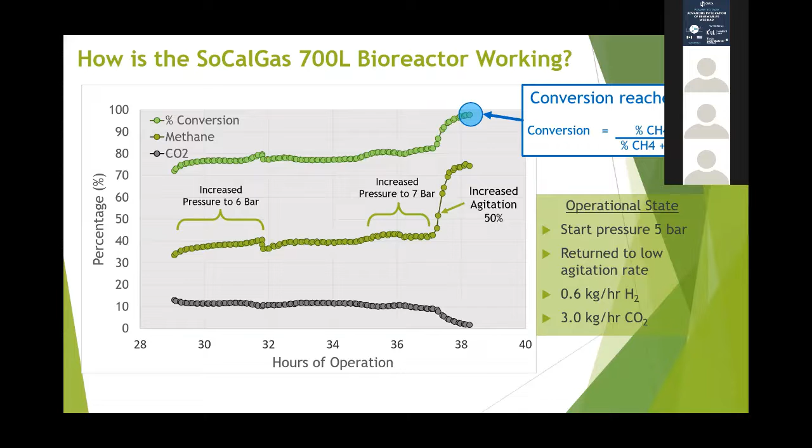This bioreactor system is capable of operating at 18 bar, and the conversion reached over 98%. You can see CO2, the gray dots, fall, and you can see changes in agitation in that last step. We conducted this research during the first 40 hours of operation back in August, showing 98% conversion of CO2 to methane.

And some of the economics - it probably needs to be said one more time that starting with low-cost electricity is really the enabler to having low-cost hydrogen, and then decreasing the electrolyzer capital costs. All the companies, whether it's Siemens, Giner ELX, or now Hydrogenics, McPhy, ITM - all the electrolyzer manufacturers, my apologies if I missed any - they're all working on and have this pathway to cut electrolyzer capital costs.

This shows a waterfall chart on how to achieve down to about $10 per MMBTU. I have to make this point each time: there is a market for renewable natural gas that is different from fossil natural gas. Being at $10 or $15 per MMBTU requires not only low-cost electricity, but on the y-axis here, a carbon market incentive. If you're in Maine, for example, they pay $9 per MMBTU. So the idea is not to compete with fossil - it's going to be difficult, if impossible, to be at $3 per MMBTU. But there are carbon markets and RNG markets that support technologies like this.

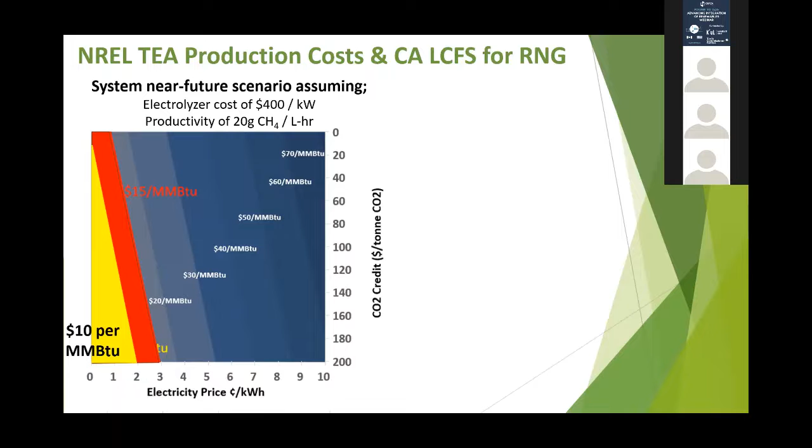The LCFS is one of the enablers as well, where if your production costs can be in the $10 to $15 range, you're eligible for credits depending on whether you're at a dairy or a landfill, and you can see the different credit values that the LCFS provides.

Our partners, once again, we've been working not only with Sunita and the Hydrogen and Fuel Cell Technology Office, but Bioenergy, Solar, and Ron Kent, who will speak shortly at SoCal Gas, has been an amazing partner. Our technology provider, Electrochaea, out of Germany, has teamed up with Storengy and Engie, and there's real promise to continue this pathway for this technology. So there's our partners and my contact information - feel free to follow up with questions directly or otherwise.

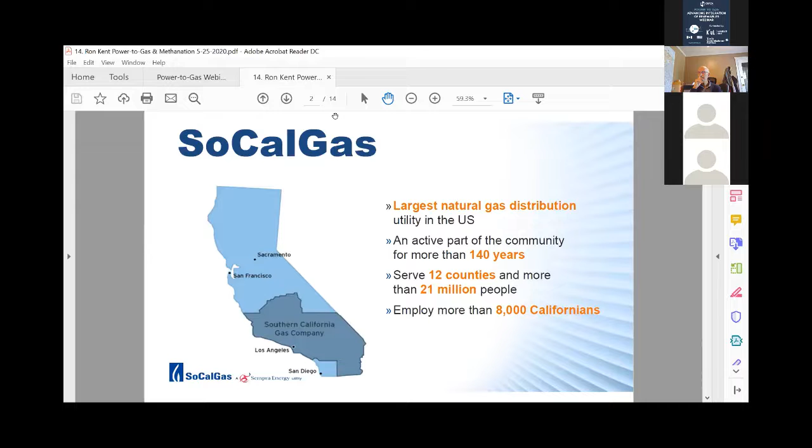We're looking at a variety of what we think are scalable, affordable solutions. Electrolytic hydrogen with methanation, as Kevin has talked about. A different approach, called electromethanogenesis, where you don't need an electrolyzer, you just go electrons to methane using microbes. Electrochemical CO2 reduction, which is again taking electricity and making methane with CO2, not requiring the production of hydrogen. And distributed electric steam methane reforming with carbon capture and sequestration.

That's what I'm going to talk about today. There's a number of other things we're doing: methane pyrolysis, electrocatalytic compression, biomass gasification with carbon capture, solar water splitting, and hydrogen blending. There was a presentation earlier about hydrogen blending - one thing we've discovered is putting baffles in the pipe is a tremendous help to getting good mixture. Thought I'd just throw that in here.

So power to gas, as Kevin discussed, we have two approaches. What Kevin discussed was option one, where we have water electrolysis plus biomethanation. The other approach is what we call electromethanogenesis, where we have electrodes and microbes and CO2, and they make methane.

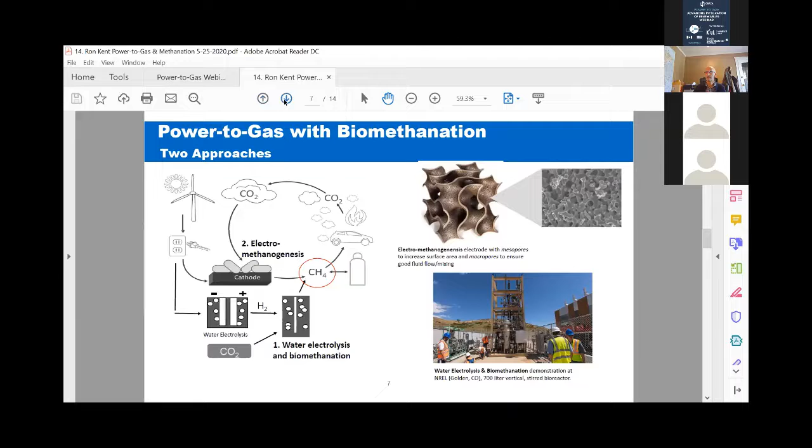And then we're working with Opus 12, a Silicon Valley, or Cyclotron Road startup in Berkeley, to do electrochemical CO2 reduction. So you basically add CO2 and water, and using their electrocatalytic process, you get methane.

So why are we doing all this with methane? Why not just have hydrogen? Well, hydrogen is great, but it does reduce our energy value quite a bit. It only has essentially 330 BTUs per standard cubic foot, and methane, of course, is 990 or something in that neighborhood. So methane does do a really good job of moving hydrogen around - it's one reason maybe that we should continue to do that in some form or fashion.

Another approach completely is to take natural gas and use renewable electricity to reform it on a distributed level. So we can have hydrogen production at filling stations and that sort of thing, using electricity in these super efficient microchannel reactors. Since the process itself is endothermic, it means that even though you're starting with fossil methane, you get about a 20% renewable attribute in the hydrogen that comes out of it. So that's one thing that makes it interesting.

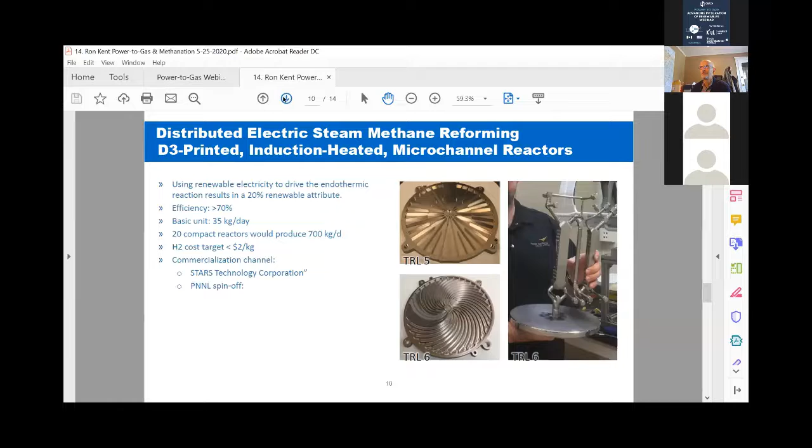And then here's something completely different. This is what we call a catalytic non-thermal plasma reactor. We create a simple corona discharge plasma and use that to drive the reaction. In a very compact form factor, we can make hydrogen from electricity, methane, and water.

This is something Kevin mentioned - there's plenty of CO2 out there. In the US, we have 200 operating refineries that produce about almost 16 billion gallons of ethanol. A typical ethanol plant produces about 50 million gallons of ethanol and emits about 150,000 metric tons of CO2.

So each 50 megawatts of electricity can recycle about 37,000 tons of CO2. Therefore, it would take about 200 megawatts of electrolysis for a typical ethanol plant to capture all of its CO2 and turn it into methane.

So there are some examples of technologies we're working on. We don't think technology is really the problem - what we need is an ecosystem that would support it. We need laws, regulations, and tariffs to actually allow this to happen.

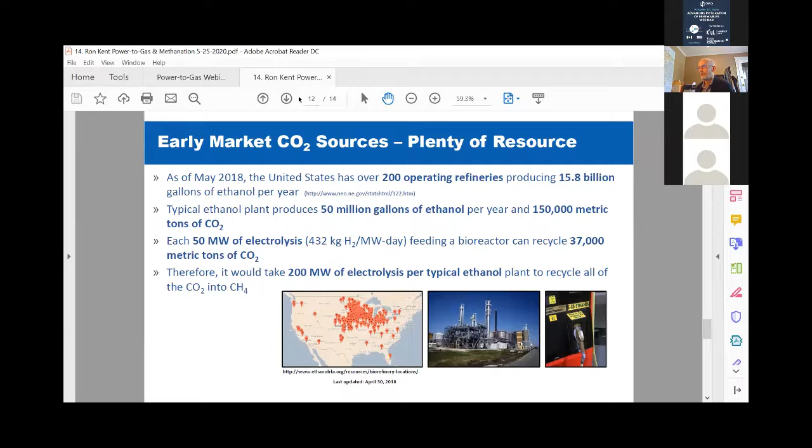We need to model the dispatch of large, long-duration storage systems, perhaps create what we call a virtual storage island that can be dispatched. You put electricity in there when you have excess, and you can pull it out when you need it. This virtual island would, in physical reality, be distributed throughout the region, but treated as one island.

And then finally, we need access to wholesale electric rates. We can't be paying commercial retail rates for the electricity to make hydrogen. So we need to get access to the wholesale market. None of that really exists at this point, and it's a huge barrier.

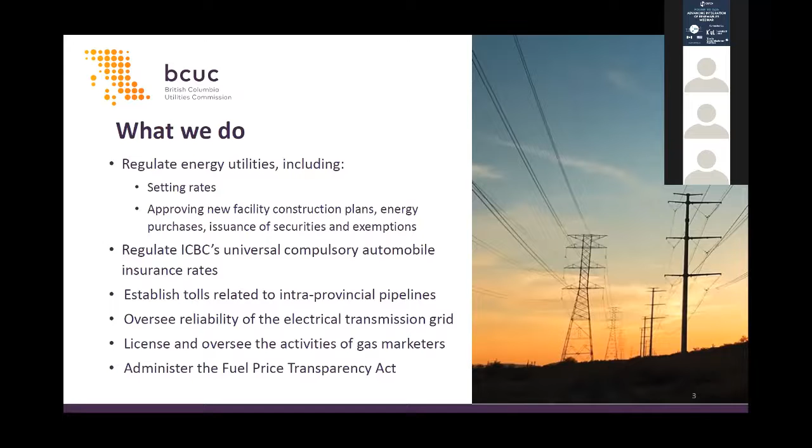So basically, any person who owns or operates equipment from production to delivery of electricity, natural gas, or any agent for the production of light, heat, and cold is considered a public utility, which means that most entities providing utility service are regulated by the BCUC.

There are certain exclusions in our Act. This includes municipalities, certain geothermal activities, and things like wellhead production of oil and gas.

Generally, energy utilities are regulated because there is no, or limited, competition to provide these energy services. Regulation is often needed when customers do not have a choice of energy provider, such as natural gas or electricity, or there is a need to protect the customer.

Historically, entities have been owned and operated as an end-to-end production to distribution service, but recently we are seeing technological developments that mean generation in particular can be built in smaller increments and owned by companies independent of traditional utilities. In terms of hydrogen, what this means is under current legislation,